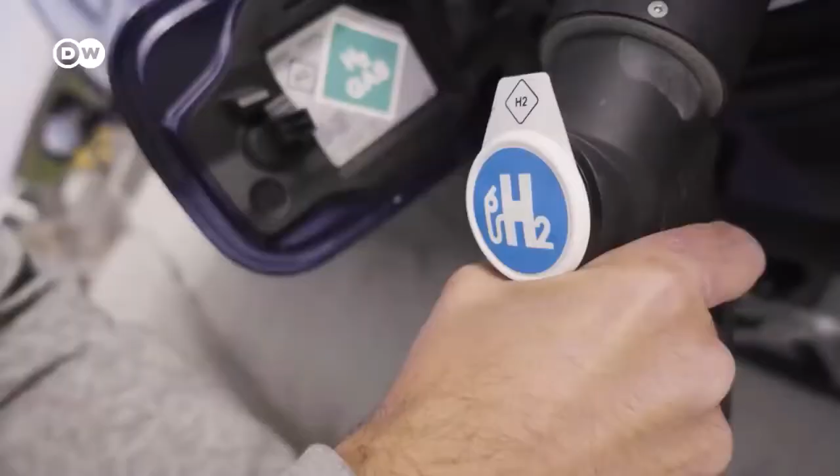Hydrogen. The wonders of hydrogen. It's the magic fuel that can power our cars, trucks, trains, ships and planes. We can even make steel with it, and the best thing: the only byproduct of consuming that fuel is water and the energy that comes with it.

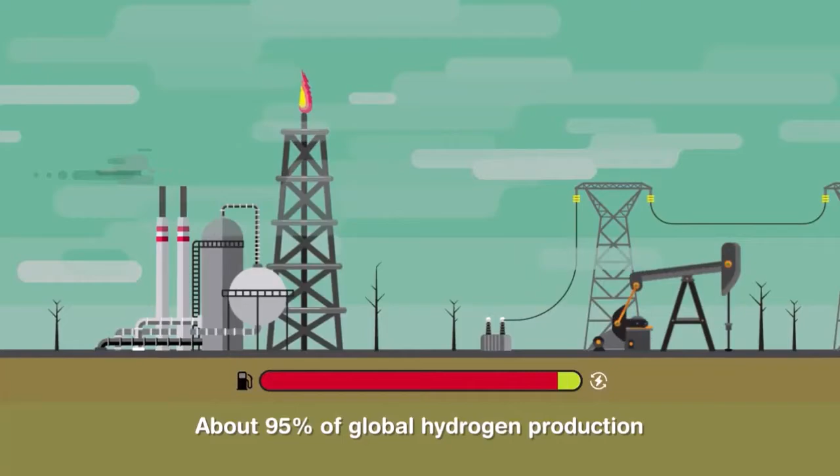About 95% of global hydrogen production relies on fossil fuels. The shift towards renewable energy sources is essential to the energy transition and a key factor in producing green hydrogen.

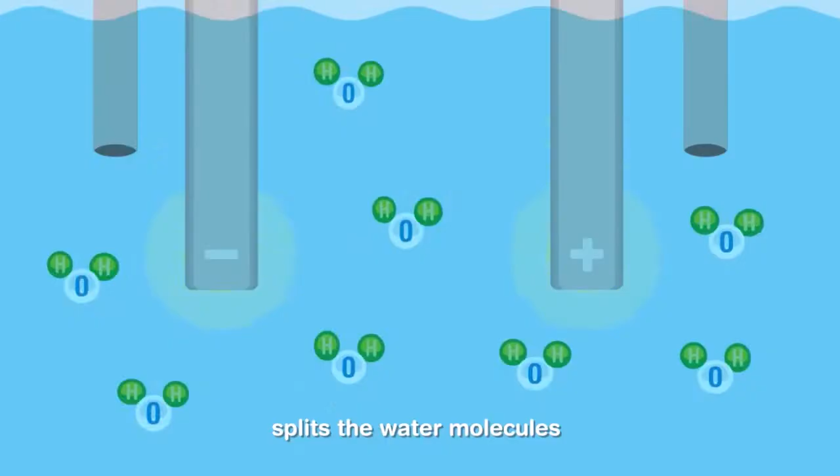Powered 100% by renewables, primarily from wind or solar power, the process of electrolysis splits the water molecules to create green hydrogen and oxygen. When voltage is applied, hydrogen is produced at the cathode and oxygen at the anode.

This means hydrogen can be stored and transported by truck or train to power maritime cargo ships or fuel cell vehicles on land, such as buses, cars and trucks. In the future, hydrogen can replace fossil fuels for all transport.

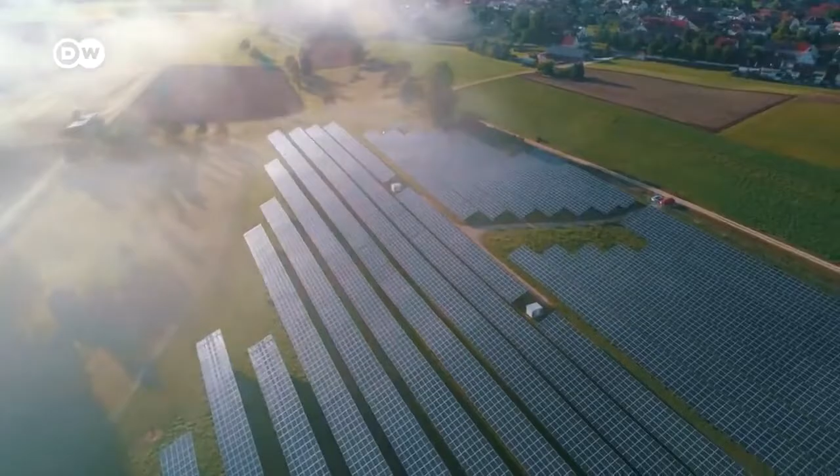As the world is slowly waking up to the climate crisis, companies and entire countries are committing to not only reduce emissions, but to reach net zero. Zero emission. Net zero.

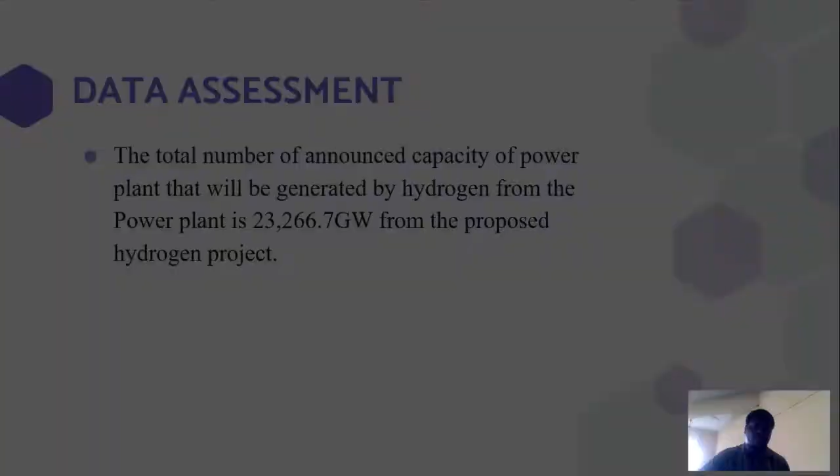So, firstly, for the first question, we analyze the water impact of green hydrogen production for the Netherlands with the data sets provided. The total announced capacity for power plants is about 23,266.7 gigawatts for the proposed hydrogen projects. The installed electricity capacity in the Netherlands as of 2020, from combustion fuel, is about 24,000 megawatts, which consists of about 57% of the installed electricity capacity in the Netherlands.

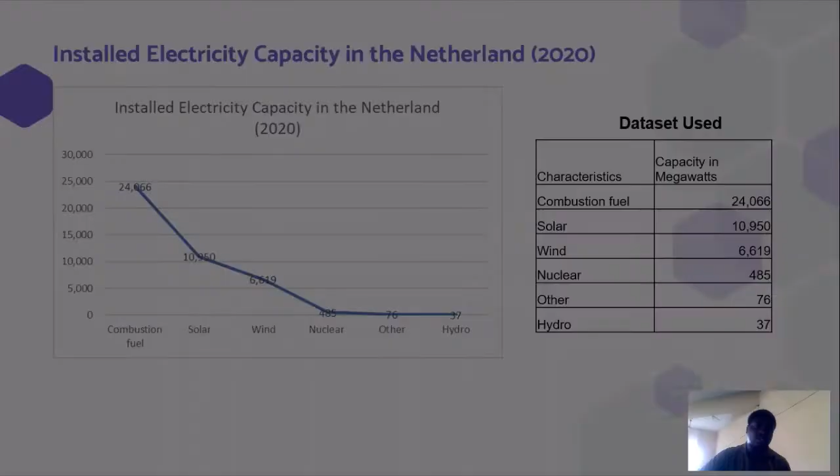This will produce a lot of CO2 emissions, which, as of 2021, amounts to about 418 grams of carbon dioxide per kilowatt hour generated, which in turn affects human biodiversity and the environment at large.

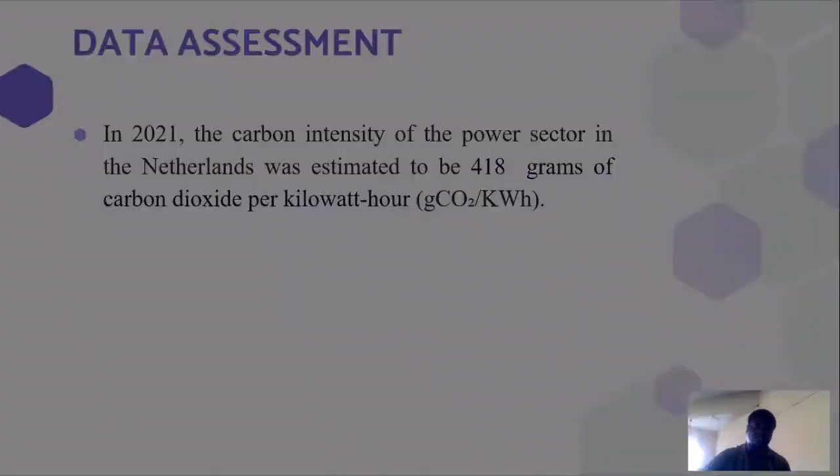So the net water impact of green hydrogen production in the Netherlands depends on several factors, which include the source of water used for electrolysis, the efficiency of the electrolysis, and the treatment and disposal of the resulting wastewater.

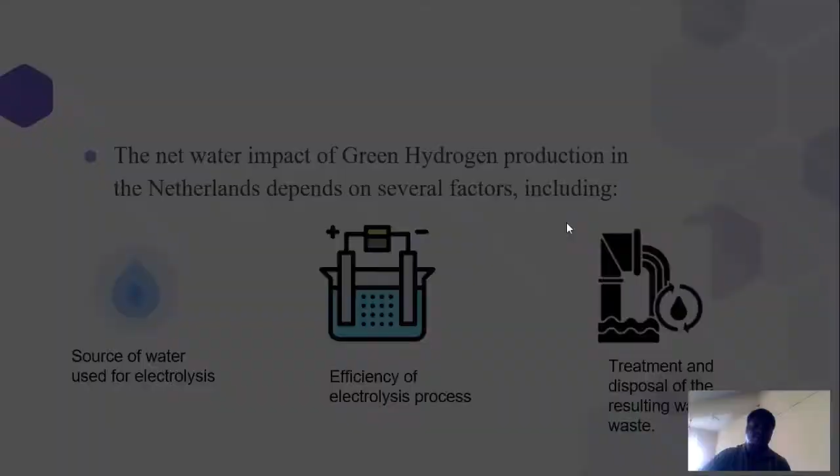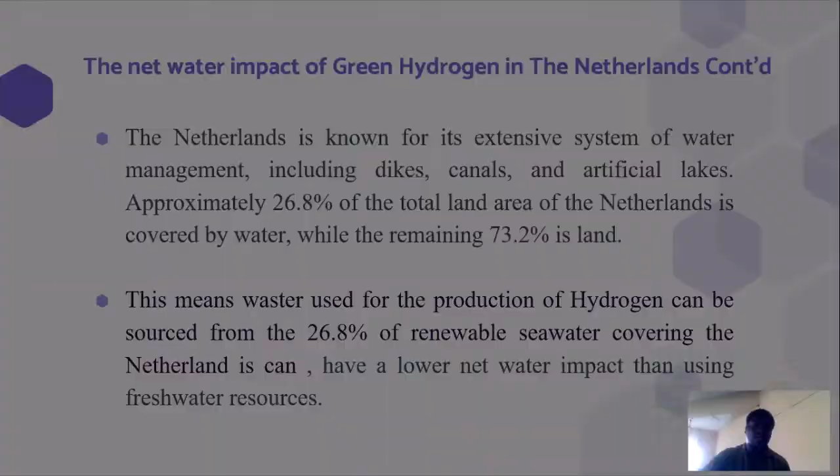The second question now, we do some calculations, which is the volume of water used, the electrolysis efficiencies in megawatts electrical, and the likes. Then we check for the net water impact of green hydrogen in the Netherlands.

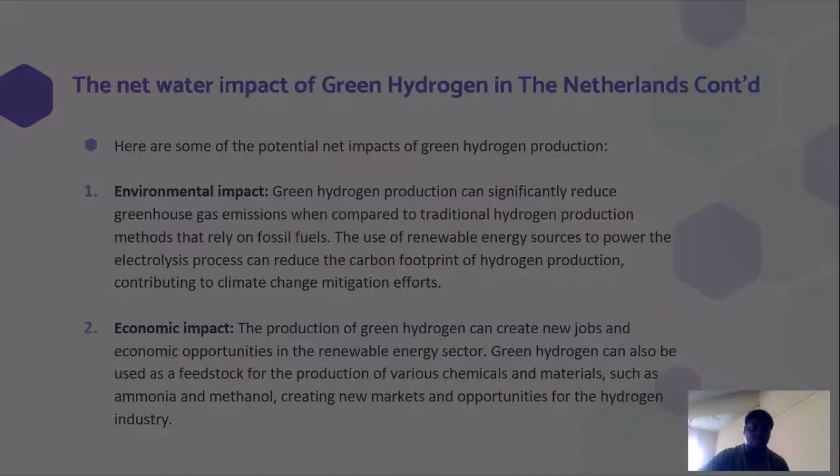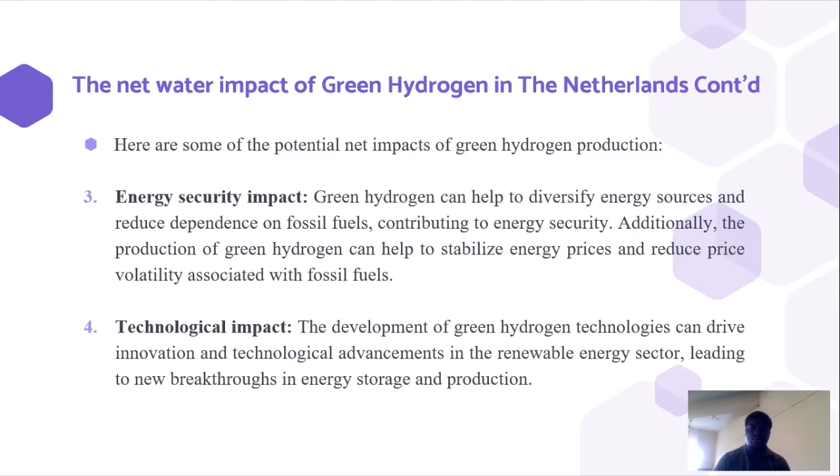We have potential net impacts, which include the environmental impact, the economical impact, the energy security impact, and the technological impact. For instance, technological impact is talking about the development of green hydrogen technology, which can drive innovation and technological advancements in renewable energy sectors, leading to a new breakthrough in energy storage and production.

The second question was talking about quantifying the water impact of full-scale green hydrogen adoption. So we analyzed the data and we got that, assuming an average water usage of 9 liters of water per kilogram of hydrogen produced, by 2025 we'll be having 105 megatons H2, which means 945 billion liters of water will be used to generate it. Then by 2050, 2.25 trillion liters of water will be used to generate 250 megatons of hydrogen.

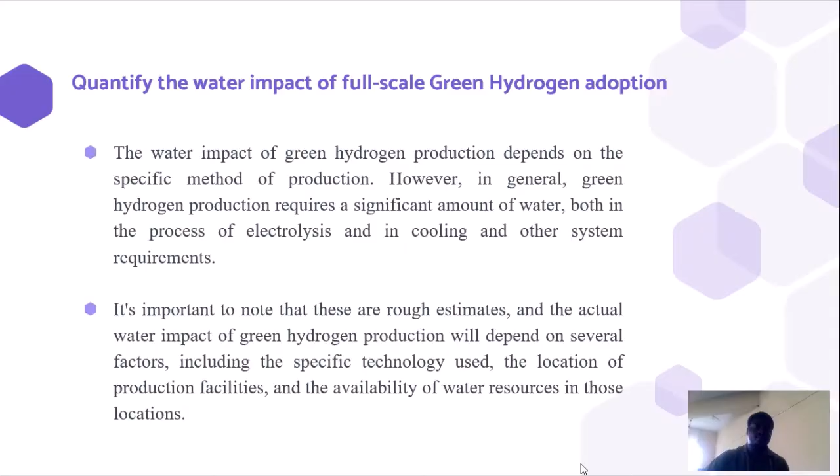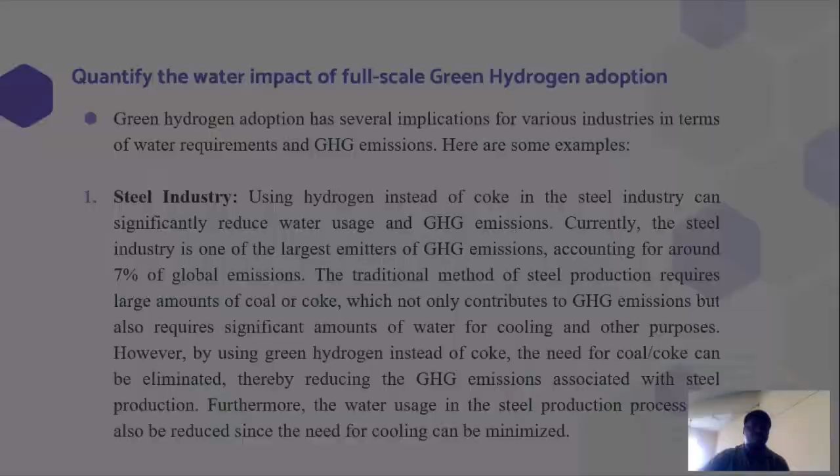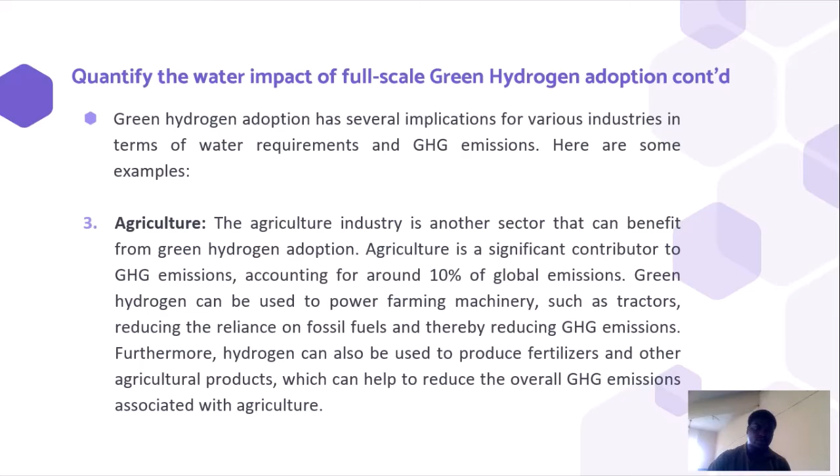The agricultural industry also has a significant contribution to greenhouse gas emission, accounting for about 10% of global emissions. So by reducing CO2 emissions from the agricultural industry, we can use hydrogen to power farm machineries such as tractors, reducing the reliance on fossil fuels, and thereby reducing greenhouse gas emission.

Then for the fourth question, we worked on various innovations at a very early stage that are attempting to produce green hydrogen using less water-intensive methods. For this, we use the polymer electrolyte membrane, which is a promising technology. It has the importance for zero emission, which is very high.

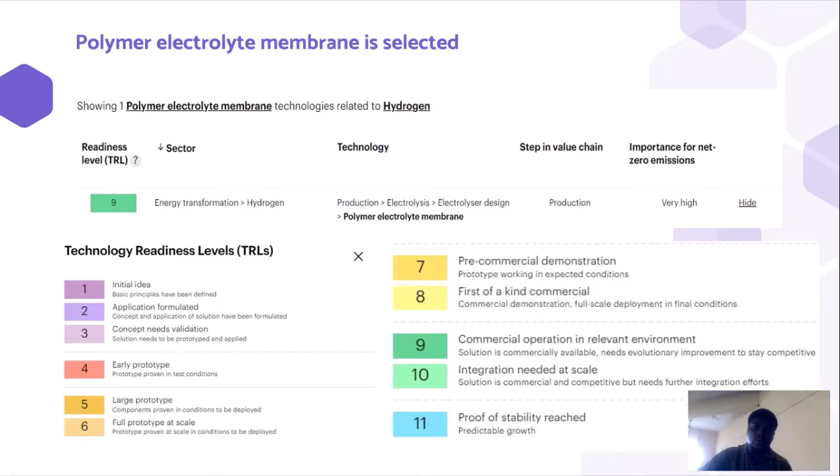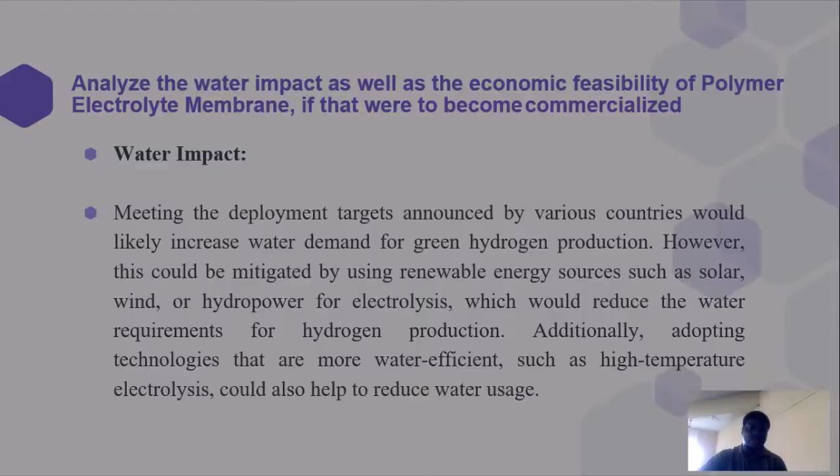Then the water impacts: meeting the deployment targets announced by various countries will likely increase the water demand for hydrogen production. But for the case of the Netherlands, there is enough water, about 26%, so there won't be a lot of concentration needed on the Netherlands. The economic feasibility was also considered for green hydrogen production through electrolysis, depending on several factors, which include the cost of electricity, the cost of electrolysis, and the technology used.

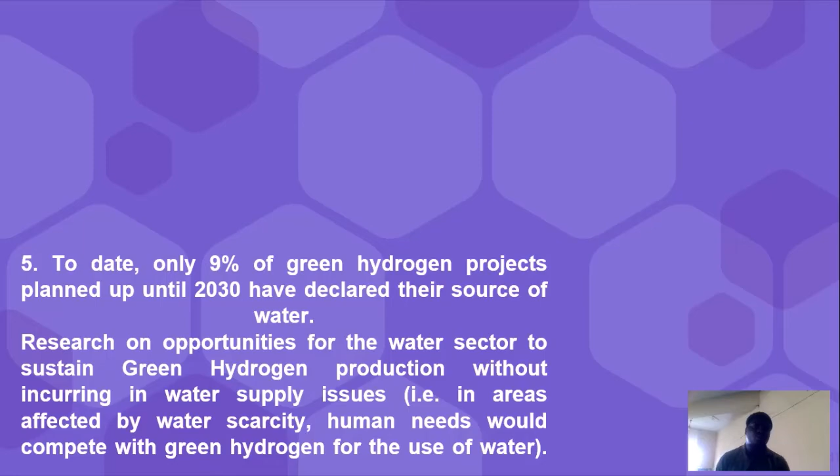Also, for the fifth question, we worked on the fact that only 9% of green hydrogen projects planned up until 2030 have declared their water sources. So we researched opportunities for the water sector to sustain green hydrogen production.

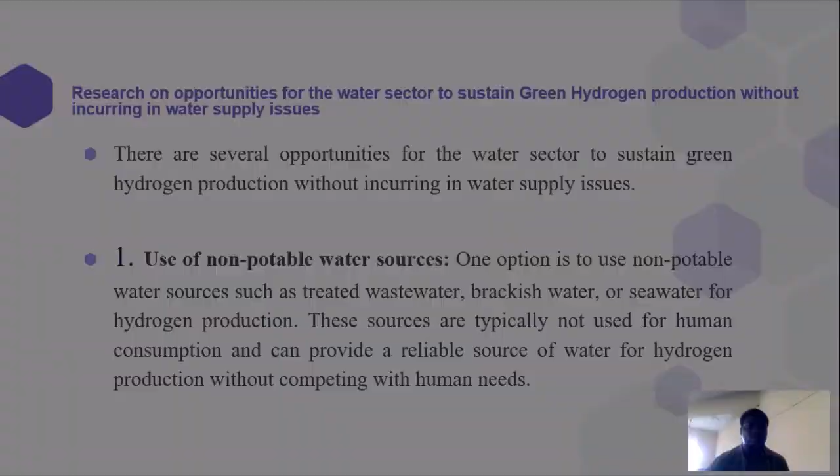Firstly, we can use non-potable water sources. The option is to use non-potable water sources such as treated wastewater, brackish water, or seawater for hydrogen production. Secondly, we can use water recycling and reuse. Another option is to implement water recycling and reuse systems in energy production facilities. This can reduce the overall water consumption of the process and minimize the need for additional water resources.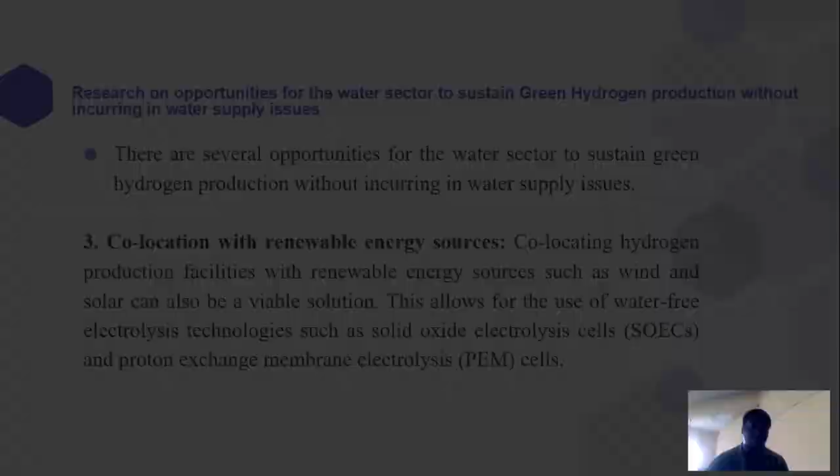Also, the co-location with renewable energy sources, such as wind and solar, can be used as a viable solution. This allows for the use of water-free electrolysis technology such as PEMs, the proton exchange membrane. Then fourth, we can use water efficient technology, so there is a need for development of...